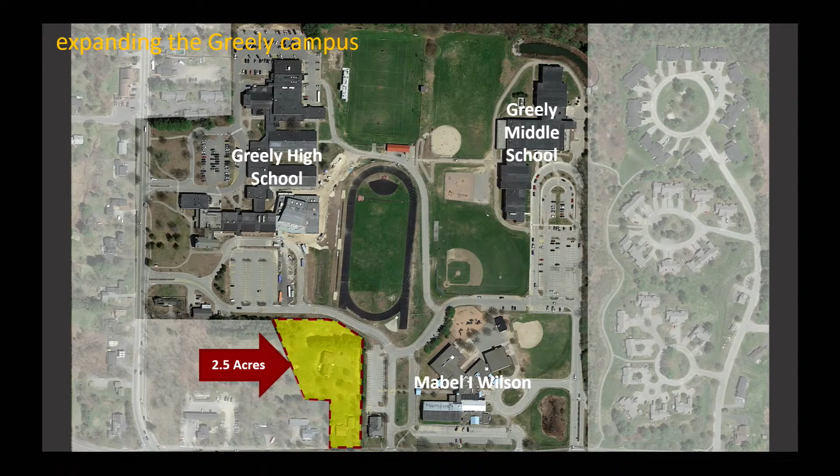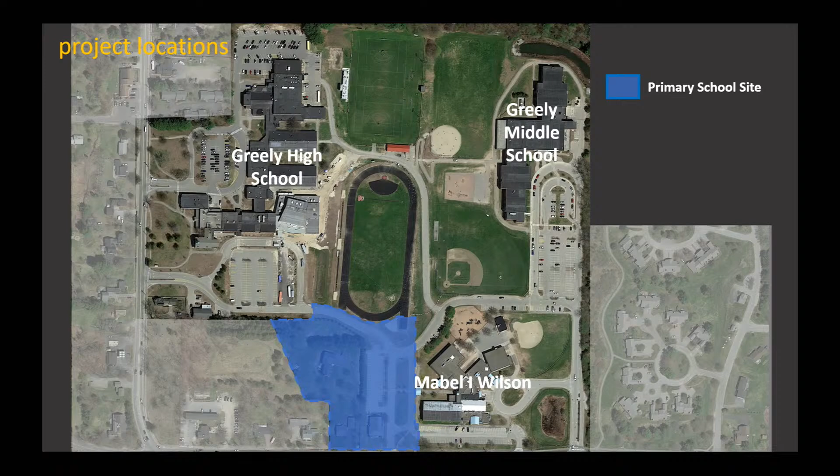From there, this is really a story of 3 different projects. The first one is that blue area that takes over the superintendent's office and the adjacent parking lot, a little bit of the access road there. That's the primary location for the new school.

This purple area is where we're looking at for improvements at Mabel I, including the addition and additional parking, which the campus desperately needs. And then finding a home for the Sweetser School in the central office, relocating that up onto Main Street, giving it the same level of visibility while respecting the historic nature of both the structure and the area that we're looking at.

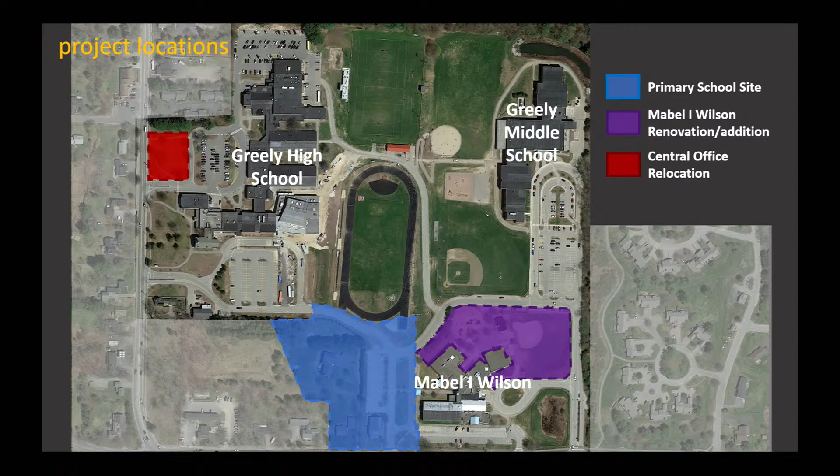So moving on to the new primary school. The first thing that we did was we took a look at the enrollment projections that had been provided, and we identified the largest number of students for any of the given years. That really served as our baseline as we started to take a look at the size of this building.

In kindergarten, the largest year was actually this upcoming year, so it'll be kind of interesting to see how enrollments coming out of a pandemic impact this overall projection. That's just about 202 students. We're looking at a class size of 18, which led to a total number of classrooms of 12. That gives us an extra capacity within that building of 216 students, so you still have 14 extra spaces before we start needing to talk about flex.

First grade is 207 students in that 2022 to 23 year. We've used a maximum class size of 20. We know the district really has an emphasis on keeping those class sizes small. That provides 11 classrooms for 220 student capacity, again making sure that this building isn't full on the first day, giving you that extra buffer of another 13 in that grade level.

The other thing we've also included in the plan, because we really understand that these projections are still a moving thing, an evolving piece of data that updates, is some flex classrooms that give you some long-term flexibility. We've included 2 in this overall plan, which gives you the ability to use those for either kindergarten or first grade for an additional 40 student capacity. So if a bubble does happen to come through the district, you're in a good position to manage it without additional construction. This program also includes 2 pre-K classrooms, and that was something I think the district decided seemed to be a good fit while still working with your outside partners to manage those programs.

Thanks, Tyler. I'm just going to review the plan for those who are not familiar with the layout. This right here is the lower level of the new building, and as you can see here is the main entrance that brings you into a secure entry, and a stair that brings you up into the upper floors.

So we have a secure administrative area in the orange. Up in the red areas, those are more of the allied art spaces. We have the gymnasium and cafeteria in this space. Here's the cafeteria, here we have the gymnasium space, and we have art and music on this floor.

We also have what we're calling an amphitheater space, but we're doing it in a flat layout so it offers a lot more flexibility within that space for indoor play and indoor recess and things like that. That creates a spine between the cafeteria, this open space, and the gymnasium. So there's a lot of open play space in here for indoor recess, which we have in this climate quite a bit.

In the lower area, down here, we have the pre-K that leads out to an outdoor play and learning space that's designated just for that grade level.

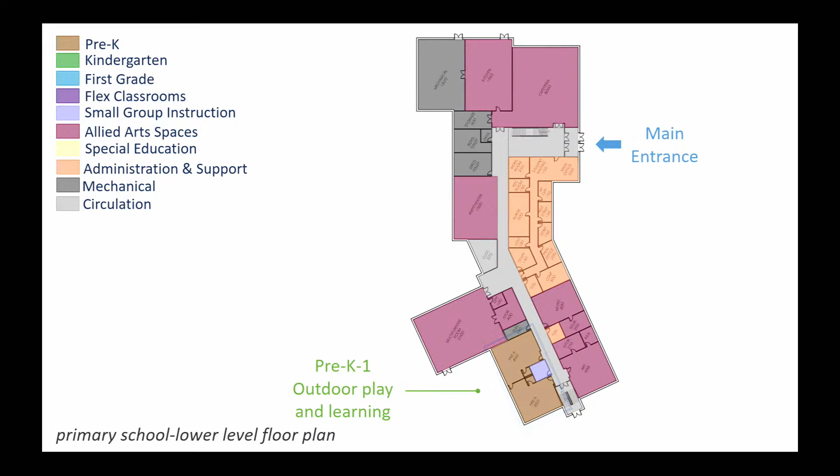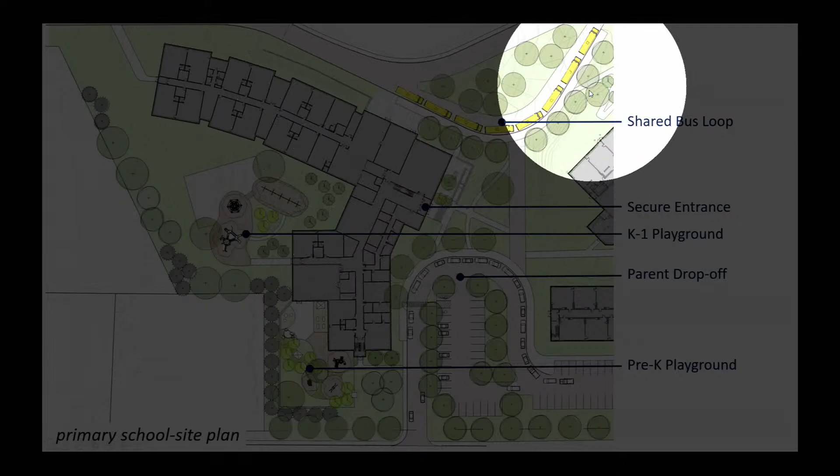And what we've done, one of the things we did was to be able to economize on space, we've actually combined the bus loop for both the Mabel I. Wilson and the new primary school into a single bus loop that takes place on the connecting central drive that runs between the high school and the middle school.

So we've effectively kind of carved away a little bit of the outdoor track area. The straight run out for the track is being relocated and proposed to be relocated, and you'll see that in the overall campus slide. And we're shifting that connector drive between the high school and the middle school up toward the track a little bit to be able to make room for that shared bus loop, which is going to be able to allow some flexibility in terms of busing and safe pedestrian circulation between the two schools.

We have a new drive here, predominantly used during drop-off and exit hours, although it's a two-way drive. It's wide enough to be a two-way and aligned with Public Street across the way. Essentially, the drop-off comes in by Mabel I, swings around the new school, and drops off, with a visitor and parent parking lot as well as staff spaces directly adjacent to that drop-off area.

We're proposing a terrace and outdoor seating area off of the cafeteria, which would provide outdoor dining and seating opportunities directly adjacent to that space, as well as a generous outdoor plaza area. The pre-K playground is located in this area.

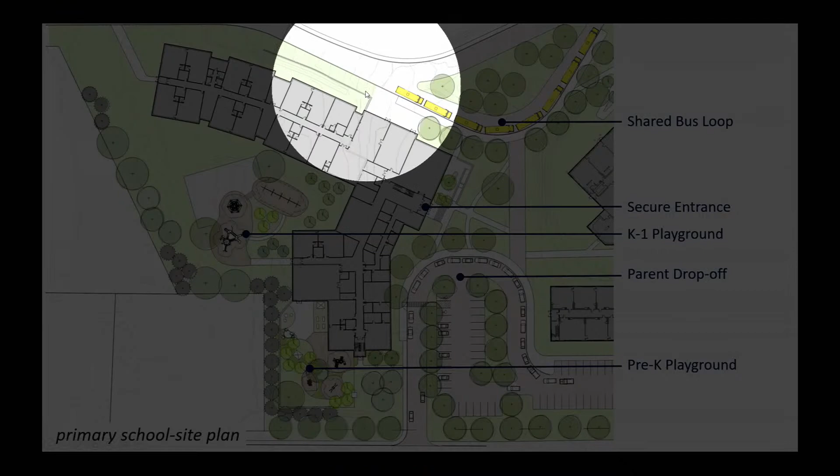Every school has to have some area for service, so the service area for the site is off the edge of this bus loop, allowing easy access to the kitchen and mechanical spaces that need close access for service, as well as direct access off that central spine without having to go around the building. We're using the grade change on the site to tuck that in as well.

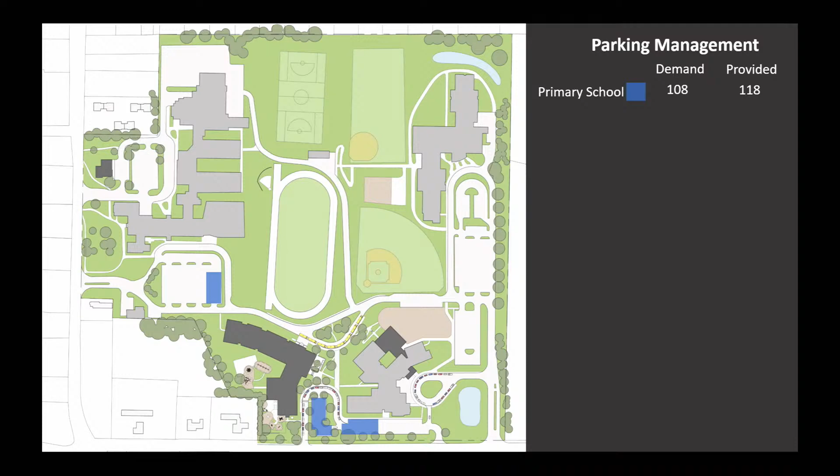This is the overall campus, and you'll see we go through various areas that will be used for parking for the individual schools. For the primary school, we've allocated a parking lot at the new parent drop-off loop and a portion of the Mabel I. Wilson parking lot, as well as some unused parking up at the high school near the Performing Arts Center. We chose that location for staff parking because of the entrance on the upper level that can be used by staff.

For Mabel I. Wilson, we're utilizing some existing parking along the campus connector road, and expanding parking where the former softball field currently is. A portion of that softball field is also going to be used for the playground.

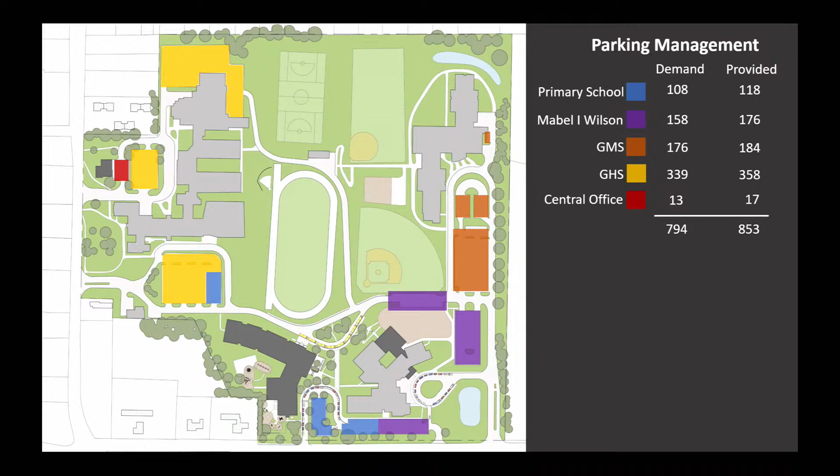The middle school will pretty much have the same parking it did before. The high school has the balance of the parking up at the Performing Arts Center, Osgood Drive, and behind the existing high school. There's also some additional parking going in for the central office, which will really just be an expansion of the existing driveway that runs through there now.

These are some of the off-site improvements that are recommended. On Main Street, we're proposing a dedicated left-hand turn lane for both the Osgood Drive and the Campus Drive entrances. The traffic study determined that was necessary and met all the warrants for it. The next improvement is over at Main Street and Tuttle Road in Blanchard.

There's been feedback that traffic often backs up almost to the North Yarmouth line there, and a right-hand turn lane onto Blanchard would relieve that significantly, along with some traffic signal improvements. Along with the turn lane improvements, we're also looking at bike access, so we've allotted for that. The last segment here is the Tuttle Road turn lane, which again will serve both the Mabel I. Wilson parking lot used for parent drop-off, as well as getting into the middle school campus drive.

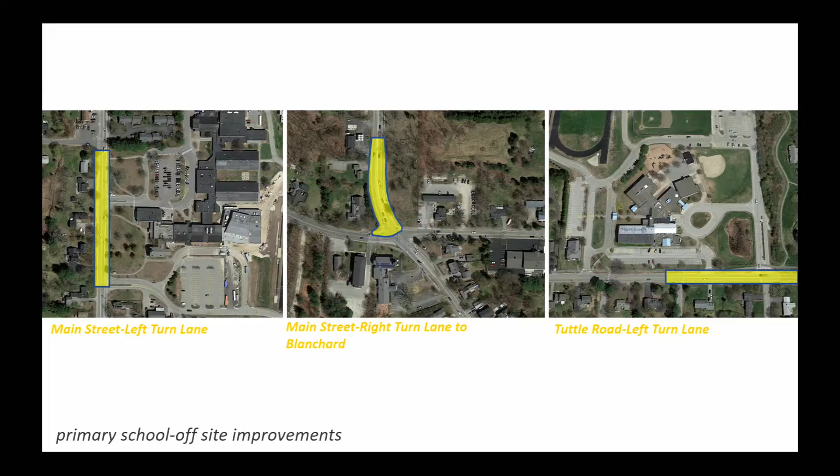So we figured we'd end the discussion on this primary school with a few images we've been working on for what this building might look like. This is our interpretation—materials could change, colors, those types of things—but we wanted to make sure it had a really good presence both from the street and from the internal campus drive. This blue object in the front serves as a little piece of jewelry on a utilitarian school building.

As we move around, you can see the grade change starting to head up on campus drive, mixing in some traditional brick architecture as well that pays homage to the rest of the campus, really trying to be sympathetic to the environment that we're in.

This is a view of the outdoor terrace that Allison had mentioned. We're envisioning some sort of stone wall or something around that to help define that space and provide a safe spot for young learners to be outside, with good visibility into the cafeteria as well.

Looking at it from the opposite direction, it really demonstrates that there's some really good visibility out of that main office - that's the small rectangle you see on the left-hand side next to the blue box. We're looking at a small set of entry stairs and then a ramp to the right-hand side that would take you up to that terrace.

Before we go on to Mabel I. Wilson, do we want to stop for questions, or should we get through the entire presentation and then open it up? Keep going. Up next is Mabel I. Wilson.

We've got an intro elevation of the new secure entrance that we've been looking at. As we moved through, we did the same analysis on this building, taking a look at the 3 grade levels that we're anticipating being in the facility, and then what the largest enrollment is projected to be over the next 10 years.

What we found for 2nd grade was 212 students in the 23-24 year. 3rd grade is 222 in 24-25. And then 4th is 230, in 2025 to 26.

You'll notice that each one of those grade levels, the largest year is progressing by 1 year. What this is demonstrating is something you may be experiencing now - a bubble class moving through the overall district, so the largest class moving from one year to the next.

So we've utilized those numbers as the baseline to set the overall number of classrooms, both for the projected enrollment and for long-term flexibility. So we're providing 11 2nd grade classrooms, a dozen each of 3rd and 4th. That gives you 220 student capacity for 2nd, 240 each for 3rd and 4th.

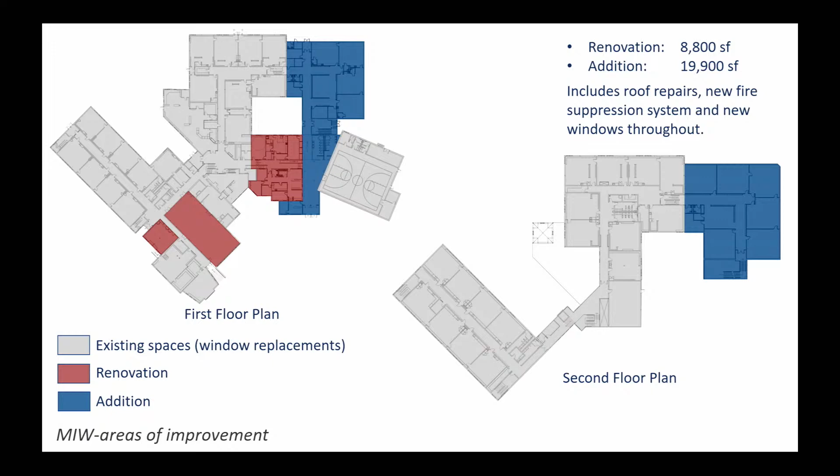What this means is about 8,800 square feet of renovation and just under 20,000 square feet of new educational space, almost all of it directly related to education—new classrooms, small group instruction spaces, and that small new entrance.

So we're going to walk through this space the same as we did before. As you can see in the blue outline, this is the new secure entrance that we've made. This building's a little tricky the way it has so many levels, so our approach is going to be sort of a two-part solution.

As you come in the main entrance, to the left-hand side there will be a check-in office on that main entry level for handicapped accessibility into the main office space to check in. Then you go through into a much larger entry foyer, which works out nicely for the number of students coming into this building now. Before, it was really condensed in this colonnade area, but we've added extra space allowing a lot more freedom of flow for students coming into the building.

That includes the office space, the nurse's space up to the north as Tyler mentioned, also some large conference spacing, small conference spacing, and teacher support spaces. So really, in that hub of the central area would be the administrative wing.

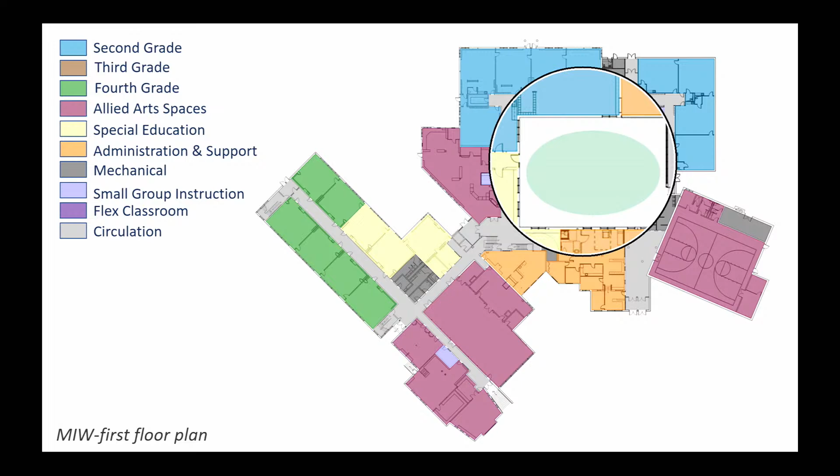One of the things we didn't mention, in the center green spot here, is that the way the addition was put onto the building creates a courtyard, an inner courtyard within the space that can be accessed from all the different wings, both on this side and this side. It acts as a really great space for children to play, for active learning, for small groups to come in, and story times. There's all kinds of things that can happen within that space that will get further programmed as it goes further into design. This is the second story space, accessed through this main stair that comes in off the lower level up into this upper third grade area.

And also through the stair system down here that feeds off into the fourth grade, so third and fourth graders sort of branch off as they come into the building.

The brown area is the third grade classrooms, and the green is the fourth grade. This area also has some shared group learning out in that open area as well.

And then this one in the center is the flex classroom we spoke about, centralized again in between the different class spaces. Then some Allied Arts space. The one in the upper area by the purple is guidance, and over to the left is one that has not been fully defined yet.

One of the things about this plan is that it's very flexible as far as location. So if for some reason third grade wanted to be where fourth grade is, or vice versa, it's a very flexible plan to move the different grade levels around if in the future you find there needs to be a difference from how it was originally laid out.

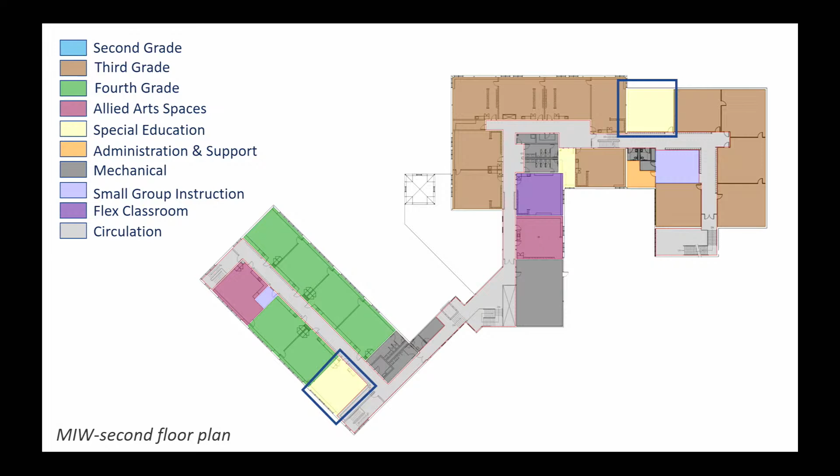And here again, additional special ed classrooms right in the wing so that they're not separated from the students too far. And that concludes the layout. Thank you.

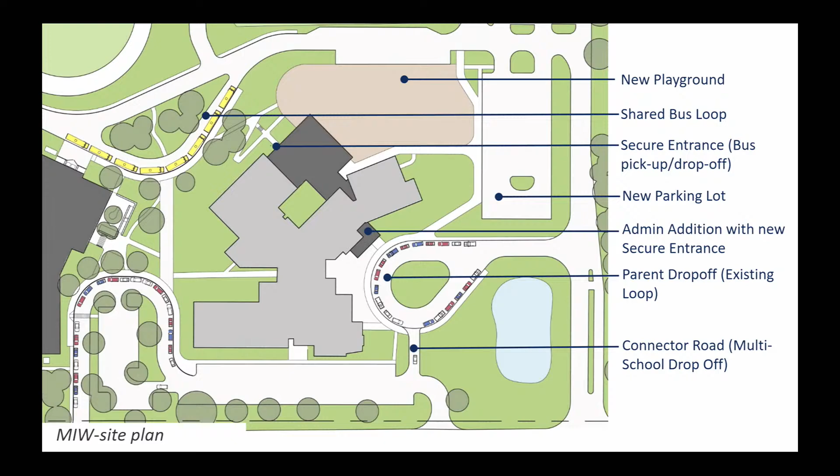I think Allison and Jack have gone over this slide fairly well, but quickly, the two important areas to see are that we've really tried to rebuild that playground space, which you can see on Plan North, and adjacent to it the increased parking. So we won't spend much more time on this one.

Moving forward on central office, when we first programmed this out with the administrative staff, the addition really started to get pretty significant, and the costs were pretty high. So we circled back around and really dialed it into what the bare minimum would be, while giving some flexibility in the future.

So we've added a small addition to the northern part of the building: the three additional offices, the conference room, and that specialized workroom/lunchroom, that's the addition. The rest we've tried to leave as intact as we can. The original suite where the administrative side currently is, we're leaving that untouched.

Your existing conference room is going to become the central record space. It doesn't have windows, so it really serves well as that secure records area. We've worked in a couple open office spaces for the special education department, and the two green offices on the right-hand side would go to support that program as well.

And then we have another secure main entrance here, similar to what you have now, where they come in, are greeted in a vestibule where they could be helped by an administrative assistant in the upper yellow piece, and then led into the waiting area if needed.

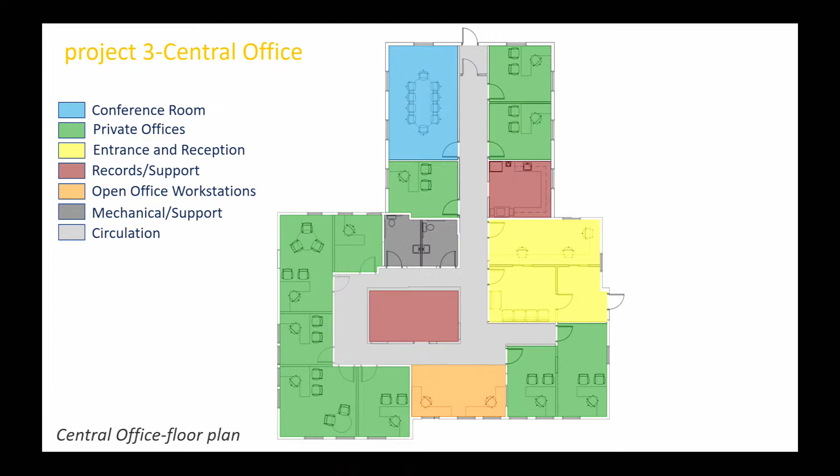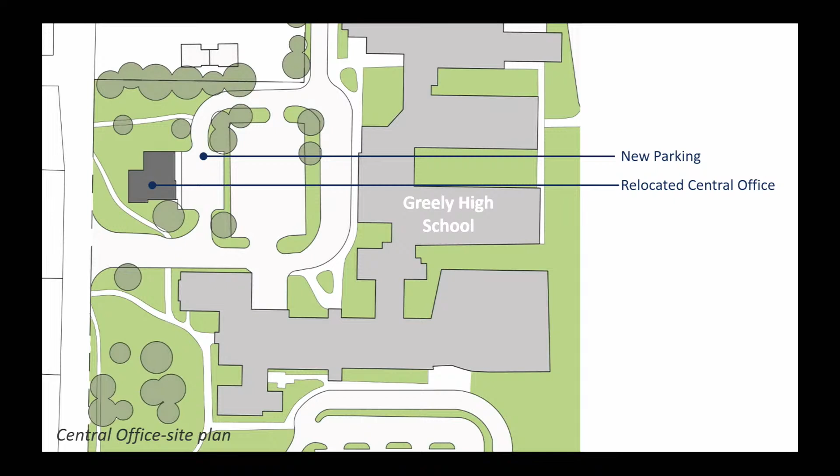So we're going to move into the overall project budget next. I've broken this out into 4 different components. We've got the 3 individual projects that we have spoken about with the primary school, Mabel I, and central office. And then we've broken out the offsite improvements, because those are really almost a standalone project when we start getting these out to bid. You'll see on the next slide and in your packet that there's a further breakdown of what's in each one of these pieces.

But the way that the estimates are generally set up, Part A includes all of the items that go into the construction of the building. So it's going to be all of the actual general contractor costs, the site development costs, utilities, all of those things that go into actually constructing the building.

Part B, the administrative cost and reserves. That includes everything from the land purchase prices. It includes movable equipment, so furniture, technology, all of those things that if you flipped the building upside down and shook it, everything that fell out kind of falls into that movable equipment piece. It also includes the administrative reserves. So we've got some money in there to pay for connections to Central Maine Power, water, telephone, data, those types of things. And then another big component in there as well are the 2 contingencies that we carry.

We carry a 5% bid contingency that helps to cover any of those market volatilities that we see. Very evident right now if you're following construction markets, the other being the construction contingency for anything that becomes unforeseen throughout the course of the project.

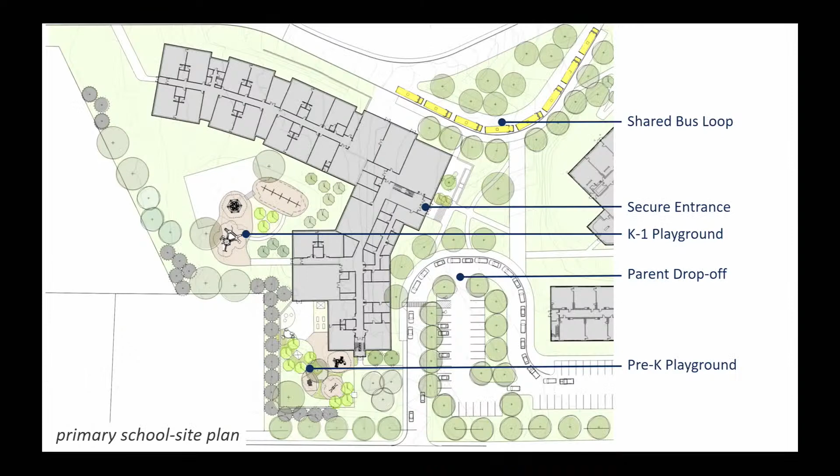These are kind of the concept level, and we'll dial into more detail as we get going. I think the big thing about those is they're really going to serve a lot of different functions, from special education to small group instruction to just small breakout areas for smaller parts of class.

So I think those are certainly things we should discuss as we move into more detail with the staff. Those flex spaces make sense to me now. I'm just thinking down the road when we need to create two more rooms, if they're next to each other - there you go, there's more space. That's a lot of square footage.

On a square foot basis, how does this project compare to others that have been built similarly in our area? Yeah, I think it's pretty on par with a lot of the publicly funded ones. The state's a little bit more tight with their square footage, so they probably wouldn't have given you those flex spaces. So those are going to kind of drive up that square footage per student piece.

But we start all of these analysis pieces with a comparative piece with what we think the state would give, and we're in the ballpark. This project is likely more square footage per student, though, for some of those things. Do we have any of that data for schools? I can get it for you, certainly. That would be great to see.

I know a little bit about when this conversation started in North Yarmouth, and we went pretty far down that path. But you said that project was up to 110,000 square feet. We're doing 95,000 here. So obviously greater square footage, but on a cost basis, do we know how that would compare if we went that route?

And I'm just looking at it from the standpoint of general construction. When you add on to something, it's significantly more expensive to add on than to build new. Just in very round numbers, I'm looking at the primary school, comes out to $586 a foot, versus Mabel I. Wilson additional square footage comes out to $809. So that's a big premium on that square footage.

So I'm thinking, if this were in North Yarmouth and without paying a premium for the land and not paying a premium for additional off-site costs, the extra turn lanes and that sort of thing, what would the number actually be if it were there? And I'm not necessarily advocating for that. I think there's a lot of efficiencies in scale in having it on one complex. However...

Sort of dividing the assets also could make sense. So if you could... Yeah, I don't think we got to the point where we had a full project budget, and that really was pre-COVID as well, and we've seen a pretty drastic increase. So I don't think I can speak to what the overall project budget would have been for that project.

And I think I'd defer back to administration on the ability to actually get land in North Yarmouth. We put out ads, we talked to everyone that came forward, and really past the Memorial School site, I don't think we had a viable option in North Yarmouth. So that's how we really ended up here. And with that additional land on the campus, it really became a much more viable option.

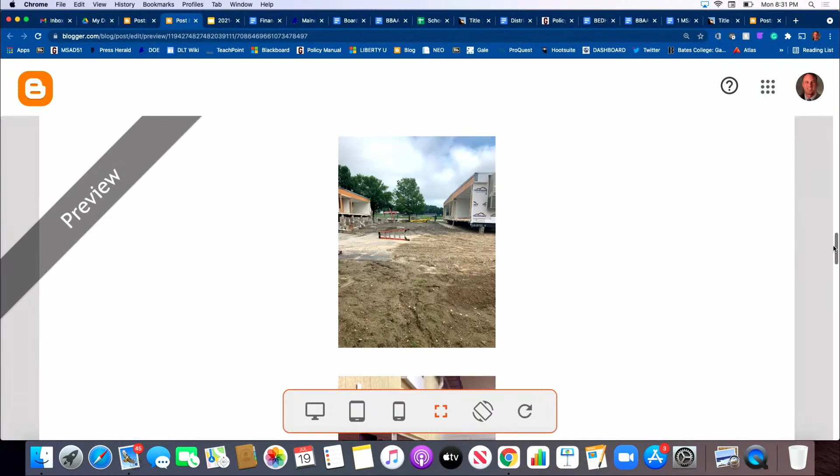This is a photo of the existing modular unit we have at Mabel I. Wilson School. As you recall, for enrollment purposes, we're adding 2 classrooms in the middle of that unit. Schiavi had to open the entire unit up, insert 2 more classrooms into the middle, and then close it back up. They're in the process of doing that right now.

One thing I've been saying for a year now is that the Commons really needs a repaint. If you've been through it recently, you'd probably agree. Our custodial and maintenance crew just finished repainting that room and it looks a lot better. We really tried to clean that room up and make it more attractive here at the high school.

And again, this is just a photo of some site work.

The MLTI update, and Dirk will enjoy this since he's our technology director. There were some question marks, as you remember during the budget process, about whether the MLTI program would continue in the state, and whether the legislature would support it, which has been around for over 20 years. Thankfully the state came through, and we've signed on for 329 new student Chromebooks for grades 7 and 8, which we'll use at the middle level.

Those are, dare I say it, free of charge, because we signed on to the state agreement for the Chromebooks, so we're not paying extra funds. That was the offer the state made, and we're going with that offer, as mentioned earlier.